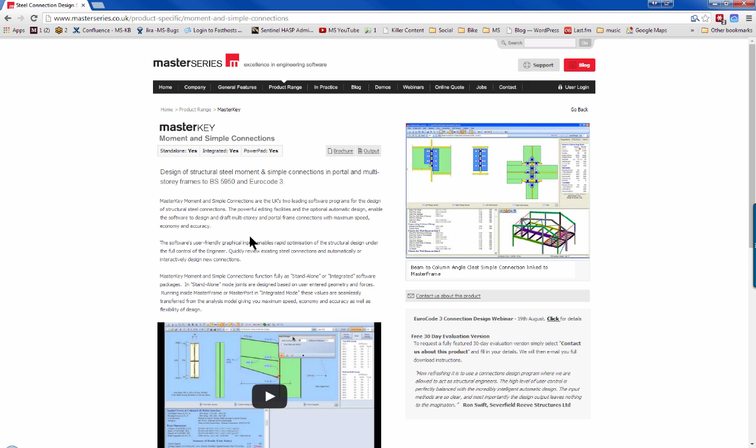Now, one of the most popular questions I get asked is, well, what sort of connections can we do? And just before we go into the use of the software, I'll just pop up this little diagram that shows you we can do eaves type connections, apexes, base plates, beam splices, column splices, beam simple connections, flexible end plates, fin plates, angle cleats, and the same with the columns. So let's go and use the software and we'll just review these different types of connections.

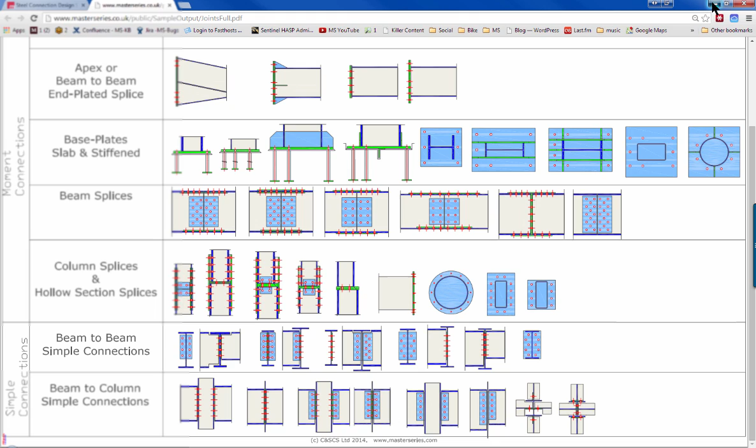So it's going to be 4 stages today. We're going to first of all view and review the types of connections that can be done using the MasterSeries, and then we'll design a few joints manually to show you how easy and fast and flexible it is for designing joints. And then thirdly, we'll look at the use of the linked design.

For those of you who have our frame analysis or portal frames, the job's even easier because you can just pull the data straight in from there. And then finally, we'll do a review and we will look at the differences between the Eurocode and the previous BS design. So let's start the MasterSeries.

I should say that I am broadcasting today to over 20 countries. I know I have people coming in from as far afield as Mexico and the USA, to the west of me, and the Seychelles and Korea and the Philippines, India, Malaysia, Malta, all over to the right, who are staying up late to see me talk.

Okay, front screen of the MasterSeries, very simple, very straightforward. I'm using version 2014-08, August 2014. I'm also using a 64-bit version. With connections, that's not a big problem, but if it was finite elements and dynamic analysis and stuff like that, yes, that's what you want to be using. So, without any further talk, let's just go straight into connections.

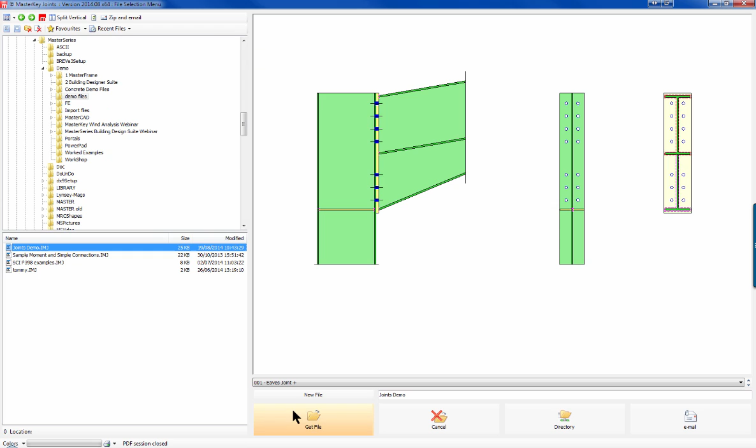And I'm going to go to my recent files, and let's look at this joints demo file that I've prepared for you. You can see we can review it before we select it. We can select other files and we can use short and long file names. But I'm just going to get this file and have a quick review. So first of all, we have our standard connection. We have our standard eaves type portal frame connection.

Bolts, end plates, welds. And the nice thing is that we can easily modify these things. If I wanted to remove that row of bolts, I just go to my bolts tab and I just say I don't want that row of bolts, and everything suddenly updates. That updates, the results update.

If I take out another row of bolts, that updates, and in this case it was just a graphical thing, but with one row of bolts top, it's now failing. I know it's failing because it's all gone blue down below, but we'll look at that in detail when we're doing some design. Let's move through the different connections. I have 21 connections here, different typical connections.

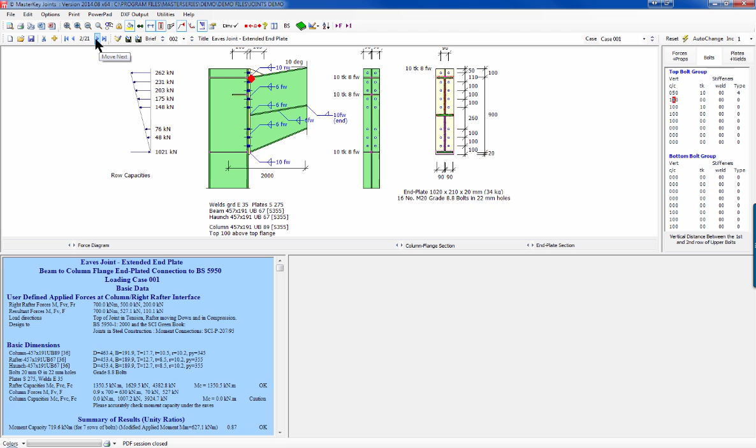This is the same with an extended end plate. In this case, the weld is not happy. So we've got our blue and we've got our weld, but we're not in the design process yet. So we'll just move on. And we're now into an extended end plate. Yes, we can do more than one row of bolts above and below. We can actually do up to 3 rows of bolts above if you ever really want to do it.

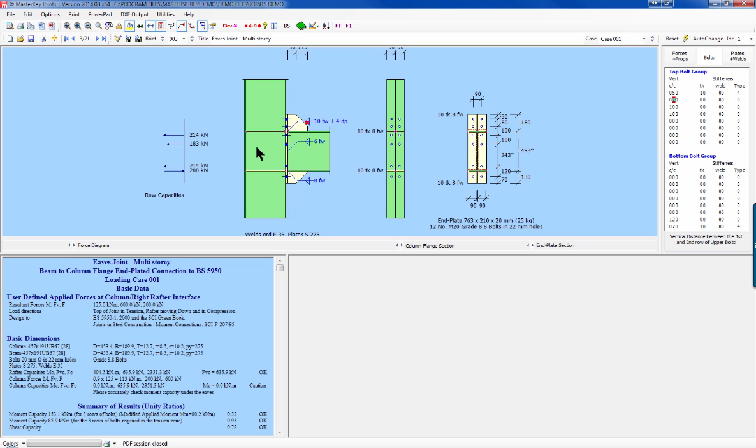The only requirement is that if there's more than 1 row of bolts above the top flange, it needs to be stiffened. And likewise on the bottom. So we could do quite enormous stiffened gusset connections.

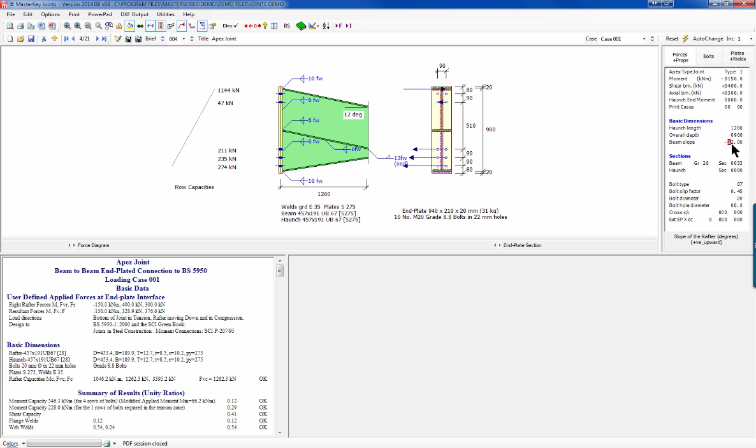Moving forward, we then move into our typical apex connection. And the apex can be either this type of haunched apex standard, or it could even be your more standard simple connection. If I came along here very quickly and just said, there we go, no haunch, no slope, it's just a beam to beam connection as an end-plated splice.

Moving forward, we then come into our base plates, axial, or in this case we do have a moment. We can see our moment because our compression area is offset to one side. I will add that we're all doing this to the Eurocode as we advertised.

We're also designing, and I should actually say no, we're not. We're now doing it to Eurocode. I apologize. We can switch between codes. So now we're designing to the Eurocode 3, and we're using the UK National Annex. Now at the end of this seminar, I will hopefully go back and show you, if I remember, how to change your national annexes.

You can, under your standard design options, choose what annexes you have. I have the UK, Ireland, the Euro norm, and I have created an additional one of the UK with a bit of a modification factor, which is really sometimes used in analysis of frames rather than anything. So I'll stick with the UK. So the UK National Annex,

and we can see that we're also working to publication P398. This is the big SCI publication on moment connections that took quite a long time to come out, and thus the delay in everybody releasing full moment connections to the Eurocode.

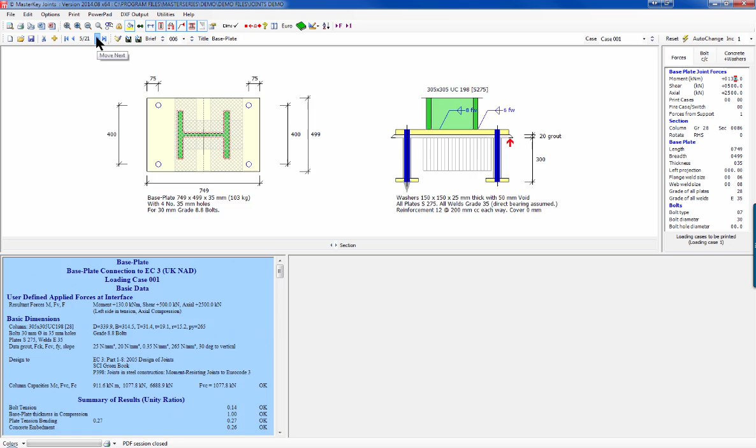And then also we have the same for the hollow sections, be they circular or rectangular hollow sections. For the circular hollow sections, we can even put the bolts on a pitch circle diameter for you and give you a circular compression area and a circular cantilevers out from the flange.

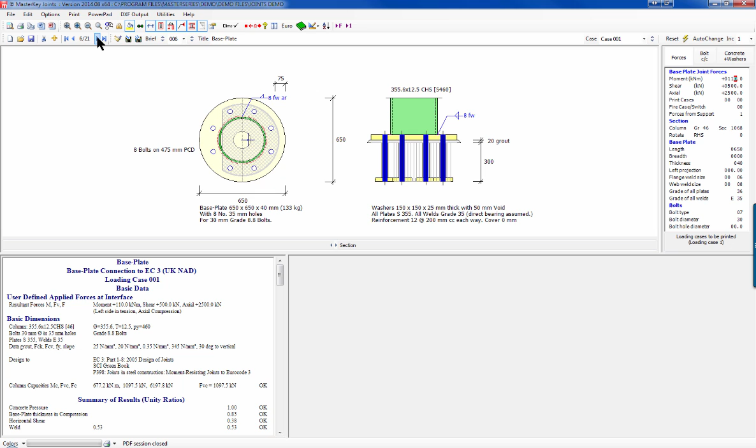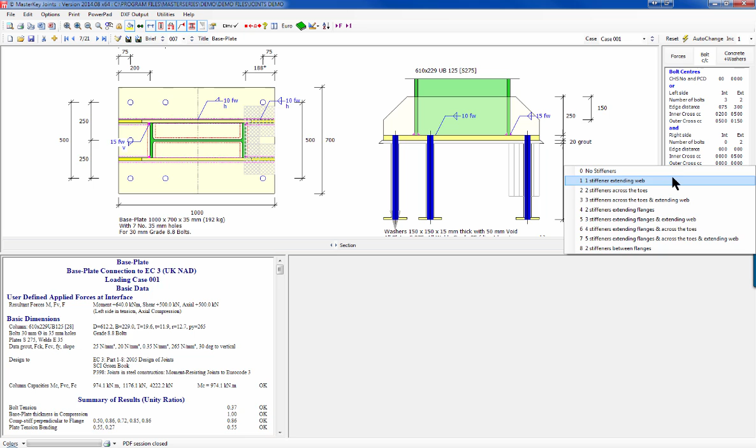And then we have the stiffened base plate. So we're still only on our third principal connection, and this is our base plate with stiffening. We have quite a few different configurations of stiffeners, and if I just moved over to the stiffeners, I can ask for one coming out of the web, so extending the web. In this case it isn't going to help us.

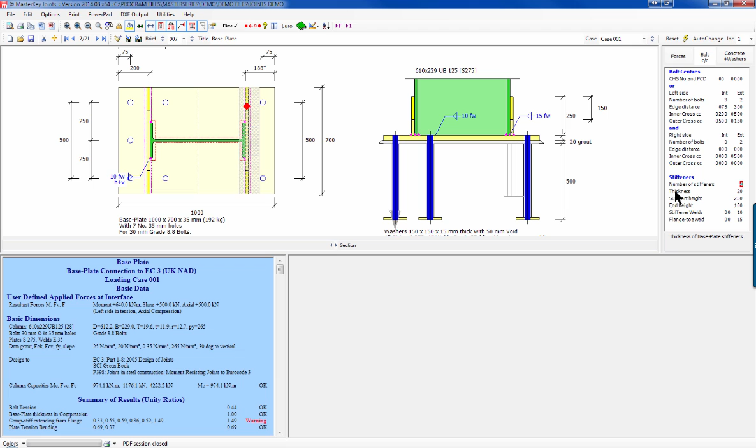If I click again, we can have two across the toes as we saw. We can have toes plus the web. We can have the extending flanges. So that's going right across the flanges, making those flanges wider and giving us a wider area to bend against. Again, in this case, it's still not very, very happy. And we can go all the way up to having stiffeners sticking out everywhere. And very, very complex to build, very expensive to build.

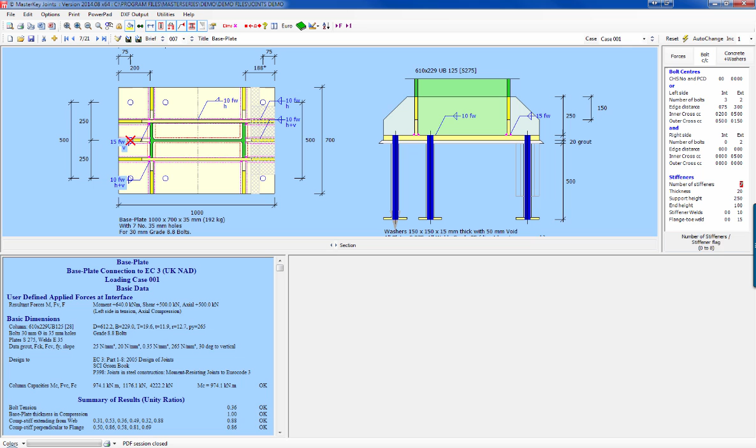Obviously, when you have a lot of bolts in tension, that's probably the type of thing you might want to go for. But personally, these days, we find it a lot more economical to just put a thicker base plate in the first place. So that's your base plates.

And now we're moving into the fourth type, the beam splice. The beam splice, very straightforward. Top and bottom plates, and different number of bolts top and bottom, web plate. We can also have internal bolt plates, and as you should notice there, we also have countersunk bolts.

We could do the countersinking if we went back. We can countersink very easily. Flange plates, I wish to have them countersunk. And our capacities should just change ever so slightly due to the countersinking, because it will make allowance for those.

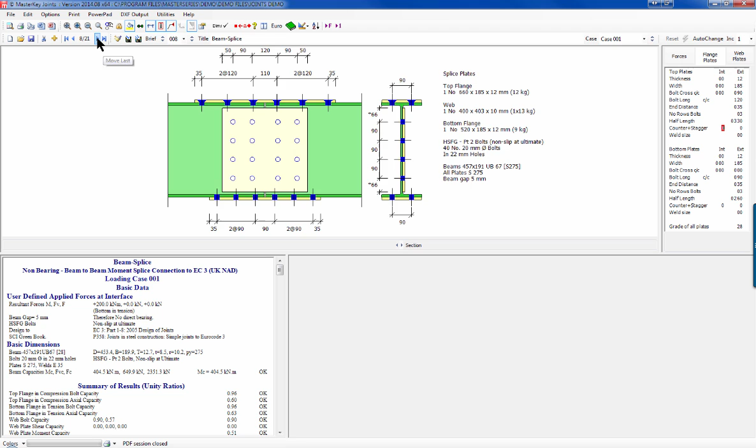And then we also were able to do complex staggered. So this is staggered in pairs. So outer, inner, outer, inner. But we also have, and very useful in very narrow flanges, is two bolts alternately staggered.

And all that means is we get a better net area for tension, because when you have a very narrow flange, a 133 or 102, putting two 20mm bolts in 22 holes is going to take out 44mm out of your precious 102, which is very, very expensive. So instead you can stagger these and spread them out so that at any one point it's only one, or with the staggering calculation, maybe 1.2 bolts taken out. Very, very useful.

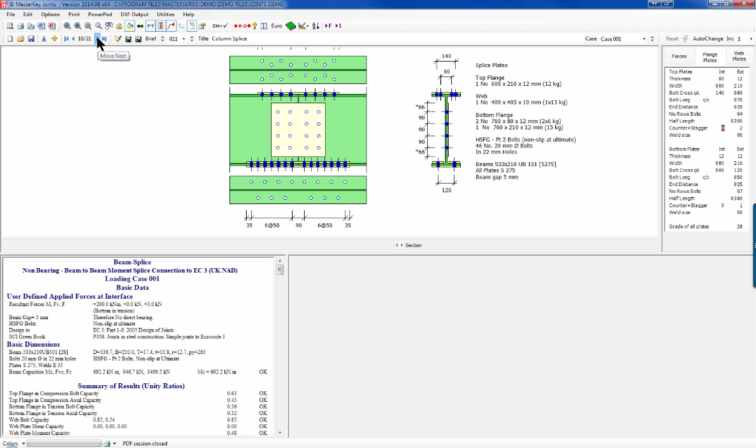We now move into the column splice, and we're looking here at the standard column splice, non-bearing cover plates. Very straightforward. We can do obviously column splices that have a different thickness or different section size above and below. In this case we've countersunk the bolts again to keep it nice and clean. We've gone for division plates so we can see and confirm our spread of bearing between them, with angle cleat attachments at the web.

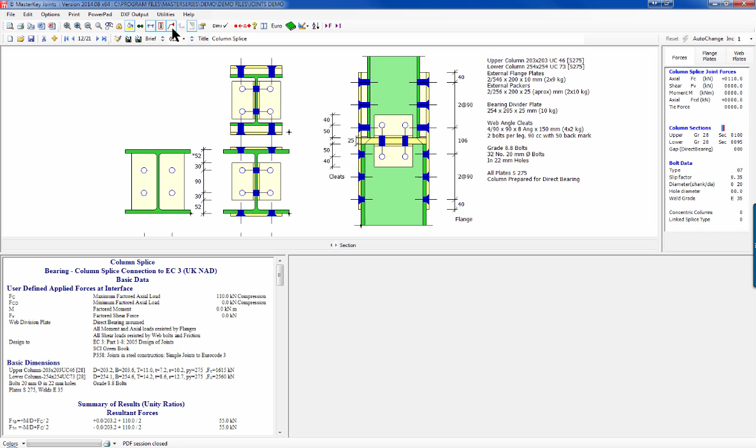And finally we can, in the column splice, do cap and base plate connections. Not ideal for doing colossal moments, but for small moments and axial loads, perfectly fine.

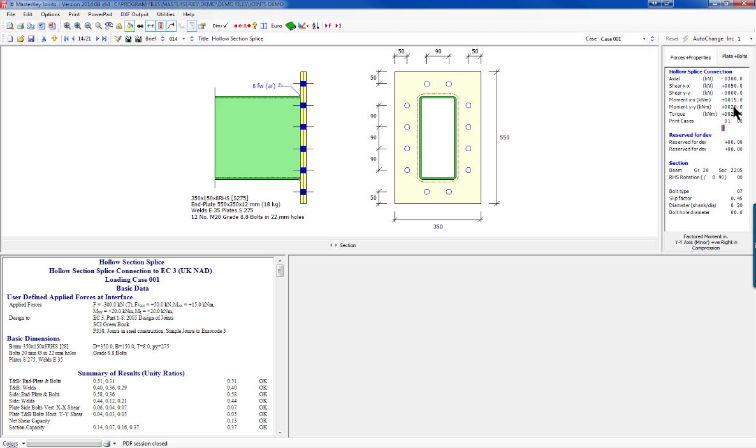And now we want to move into the hollow section splice. The rectangular and square hollow sections, you can define top, bottom, left and right bolts. You can actually in this connection define torsion and everything. You have shear in two directions, moment in two directions, and a torque. So all 6 degrees of freedom, or all 6 restraint directions, are resisted. And then your circular hollow section splice.

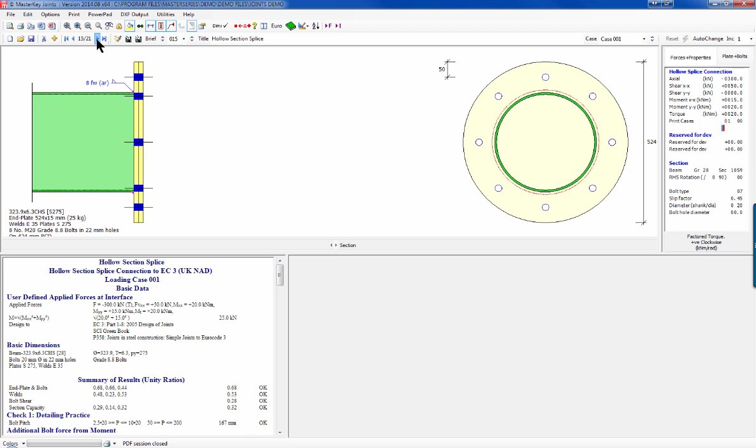Very straightforward there. Now finally, and very, very quickly, we'll move into the simple connections. Now the simple connections to Eurocode have been out for quite a while, because that publication was produced about 1.5 years, 2 years ago. That is the P358 rather than the 398. The 358's been out for quite a while.

In this case we're looking at a plate girder. We've built up a section that's about 1200 deep, and in one case we've got a single notch, on the other side we've got a double notch, and we're designing that for you. Plate girders are dead easy. Just choose a section and just put in the values and go.

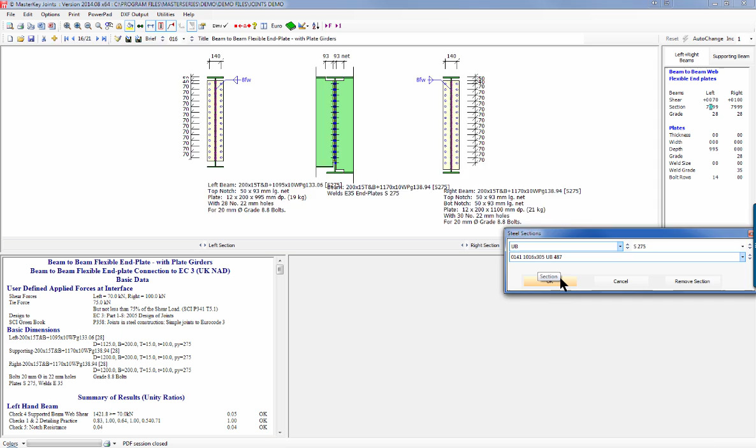If you wanted to, on this left hand side, we want to say, well actually we don't want to use a built up, we're just going to go for a 1016 by 305 section. It will then pop in that section and start to design. Now it's gone blue in the top because now with our bolt configurations, this bolt is hitting this flange, and we would need to make preparation to remove that or reduce the number of bolts on the other side. I will not fix that at this moment in time.

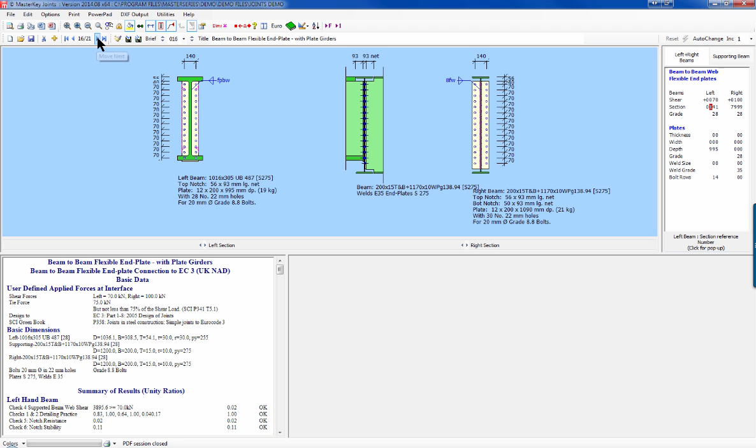And then the second type of simple connection is your most popular one these days, your fin plate. And we can handle both single rows and double rows, or in this case a double row with the bolts alternately staggered.

We also do the two forms where you can have a rigid support or a flexible support, and that's quite useful. The default is to assume that this is just a shear load in the web and the weld, and therefore you have a torsional moment on these bolts, which puts a lot of load on the bolts. Whereas if you assume a rigid support, you have shear and moment on the weld and just pure shear on the bolts, and that reduces the additional loading due to torsion, which theoretically no longer exists on those bolts. Both methods are valid to the Eurocode, and we cover both.

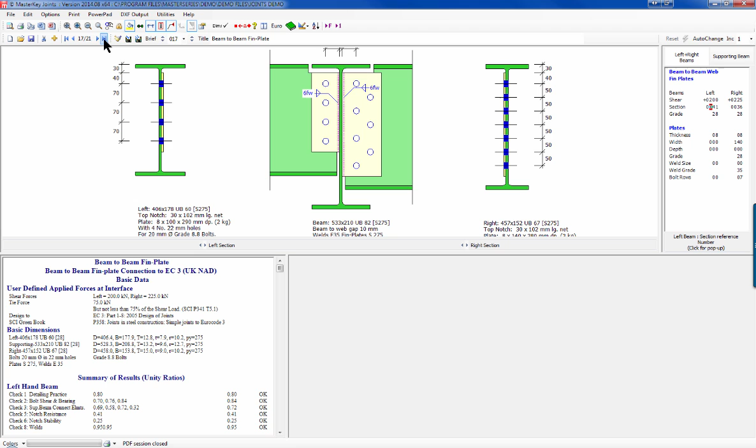And then finally you have the angle cleat. The angle cleat's quite strange in that in the Eurocode they've actually left it out. But there's no reason why we can't design the angle cleat using the rules and methods of the flexible end plate and the fin plate together, and that's what we've done. We have given you this angle cleat.

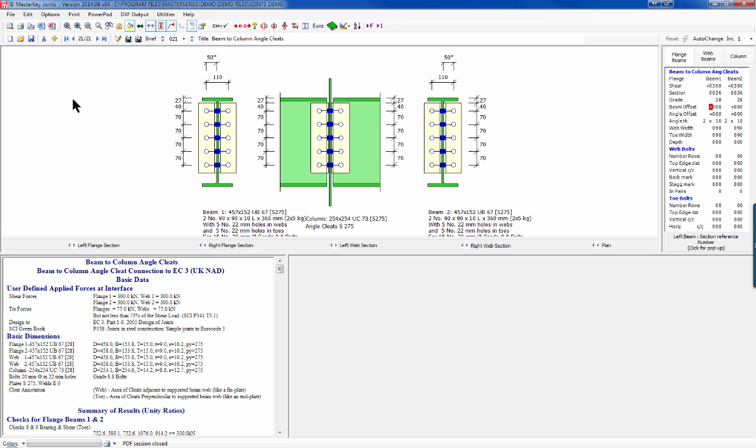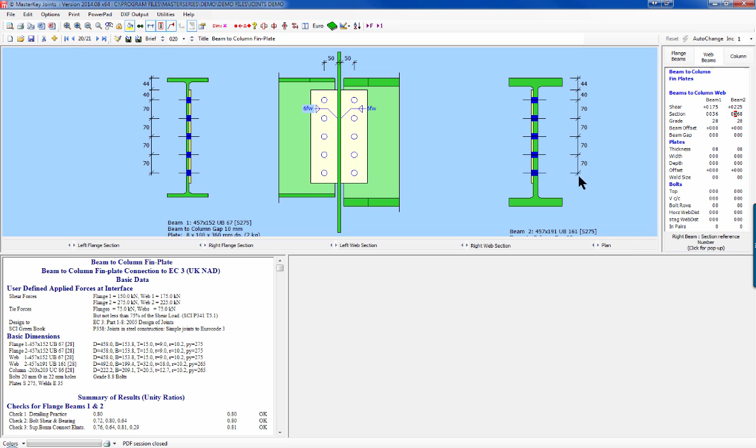And then of course we can do the same connections with columns. In this case this is a column connection rather than a beam. And the nice thing I think about the column connections, and I think the previous one was a column connection as well, for the fin plate is we can notch our connections. So if I was to go to my web and say that my column section on the one side wasn't a 152 wide, but let's go way up to a 191, and then we looked at the column, we'll see that it actually notches in that flange so that it fits.

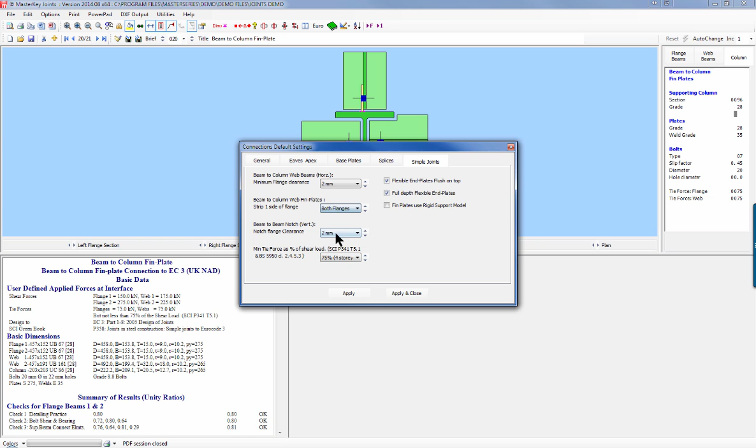We've also, because of this line, taken out the bottom flange so that we can present that beam down the middle of the column web and drop it into place. Otherwise, if we didn't take this out, the fin plate would be hitting it. For those who want to be safe and give the fabricator the option of going either way, we can elect to drop not just the bottom flange but both flanges, and we say apply and close, and therefore we lose this totally on this side so that we give the erector full scope to present his beam up to the fin plate in either direction.

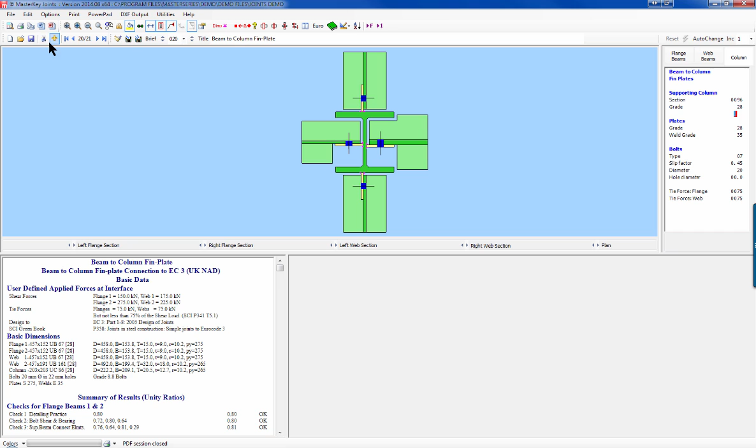So that is in essence the typical joints that we do. So let's go and design a joint. Let's create a new joint. I'm going to go for a beam to column flange. Okay. And first of all, I'm going to set some physical sizes. Column size 610, but we'll go for an S355. Beam size, I'm happy, but I'll go for the 355 these days and say OK.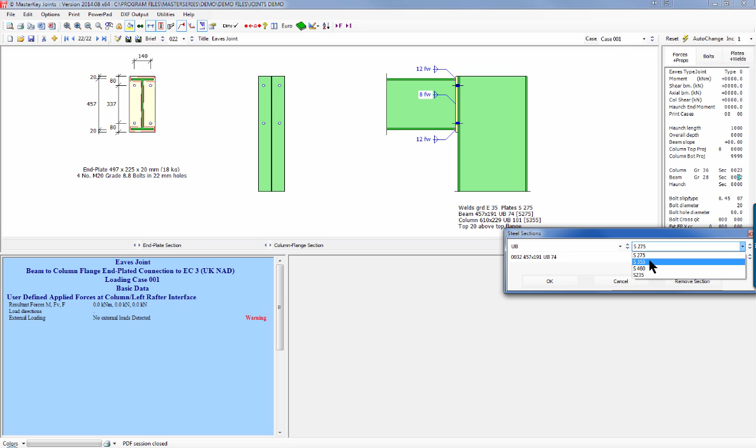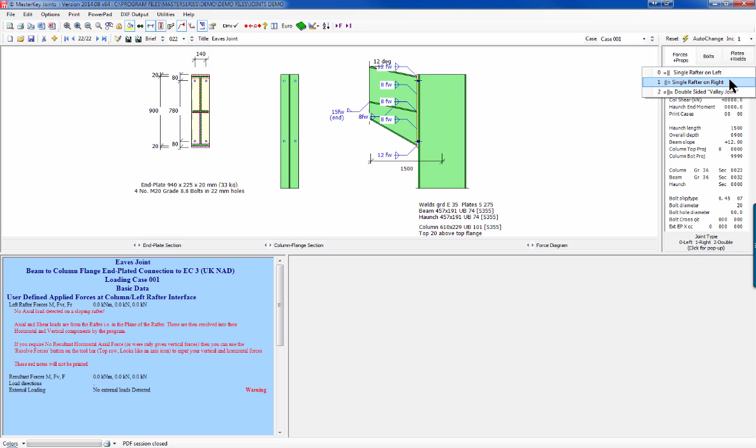I'll now make it such that it is 900 deep and 1500 long, and I'm going to give it a slope of 12 degrees. So I just want that actually to face the other direction so that it looks the way it is on my calculation. So this is the connection I'm going to design.

Let's put some values on it. I'm going to give it a 500 kilonewton meter moment, and I'm going to give it a shear of 350 and an axial of 240. I'm going to say the column shear pre-existing is nothing because we're just in a portal frame, and the end of haunch moment is 300.

So looking at it now, we have, as we can see, a blue background. We've got failures. We're failing by 2.25%. So the first thing I would do would be to add more bolts very quickly. Give me another row at 90. So we're now down to only 49% overstressed. Very quickly we're getting there, but we can see from here that it's no longer the bolts that's the problem,

it is the compression. So we come in and we will add in a bottom stiffener, and we'll put a 12mm stiffener. So we've now dropped back down and we're now only 34% overstressed. Let's add another row of bolts and make that 90. So bolts are happy, shear capacity is not. We can either add another row here and let them be used in shear, or more correctly put another row down here. So I'm going to go for my bottom group and put another row 90 up, and my connection very quickly now works.

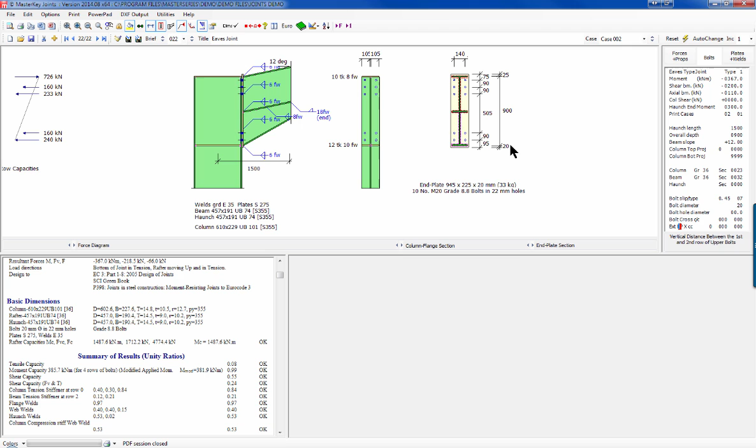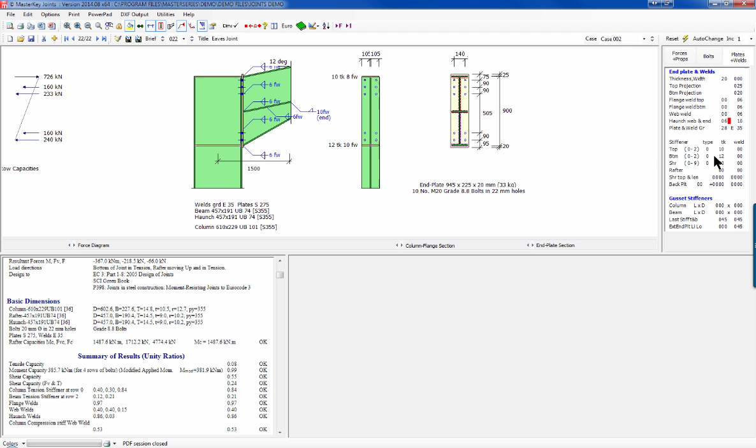If we wanted to, and I'm just going to push this out a wee bit so we can see it. This 6 mil weld, if we were into a large weld, say a 15 mil weld, that's a very large weld to lay down. Now both the BS and the Eurocode allow you to do something called deep penetration, where you're welding with such good quality welding materials and welders that you're able to guarantee that you'll get 3, 4, 5 mil of interpenetration between the plates to give you an extra weld. So you could say put down a 10 mil with a 5 mil deep penetration. So it's limiting it to 4 mil maximum deep penetration, and so it's giving us a 14 mil weld there.

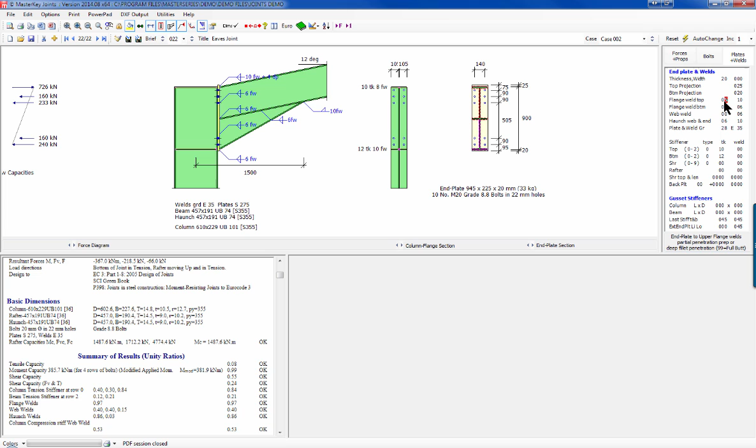So we have facilities like that. So that's how easy it is to design a connection. That's how quick and easy it is.

If I was to take a beam splice, add myself in a beam splice, and say OK, section 33, I'm happy with that. Now the moment capacity is 400 and the shear is 600 and the axial is 2300 of my section. So I'm going to put in a moment in MX of say 250. Alarm bells, ding, ding, ding. Things are problematic. And a shear of 100 and an axial of 400.

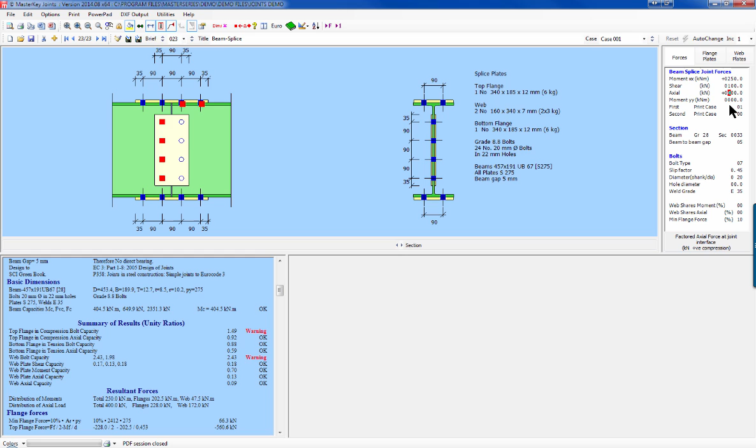So what I need to do is to come down and look at my problems in reality. So clearly it's the bolt and shear. We could possibly thicken up, but it's the ultimate, it's the problematic one, giving us 94 ultimate area. So it's no good looking at the bearing of these. The bolt itself is the problematic area. So we need more bolts.

Very, very simple. And one of the nice things we've got in the program is this ability to use something called auto change. And auto change saves you typing. So if I go to flange plates I can say, give me 3 rows of bolts. Hey, it's happy. Top. Now the bottom doesn't need as much because it was in compression and therefore has been cancelled out. Half compression plus the tension gives us a smaller value.

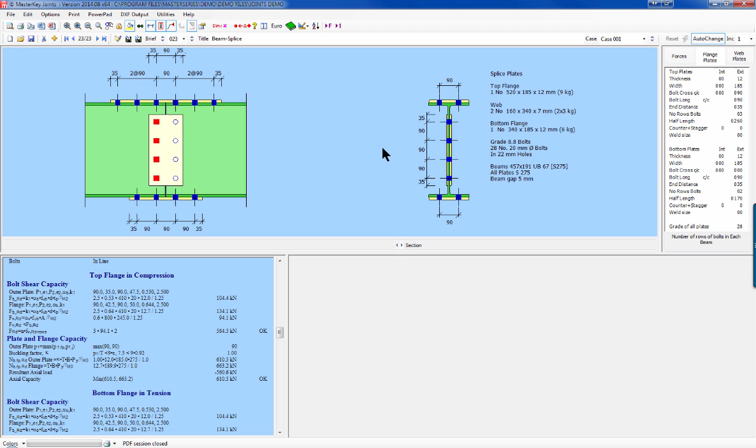My next problem is my web plates, and we're way up here in our design. Our shear of this plate is not very healthy. So what do we need to do? We need to get possibly some thicker plates and some more bolts. So let's go to web and we will see whether or not putting in another row of bolts does help. It's bringing those values down. So that is a solution. It's a big problem.

Let's see if there's another solution. We're only at 13% overstressed here. Maybe if we lengthened the bolts up, we would get the lever arms we want, but now our bolts are too close together. So coming back to 95, let's increase the thickness from 7 to 10 mil. So that's solving everything but this problem with the physical bolt. The plates are now okay, but the bolts themselves are not happy.

We could possibly go for a different type of bolt or larger diameter. So let's look at our bolt types. Well, we're using 8.8s. 8.8s are not necessarily the best to be using in these environments because your whole joint can slip, and actually there would be a warning in our dimensions that we should really use either close tolerance holes or high strength friction grips. So I'm going to go for tension control bolts. Oh yeah, they're not necessarily as good as one thinks. We're going to need more bolts. Sorry about that.

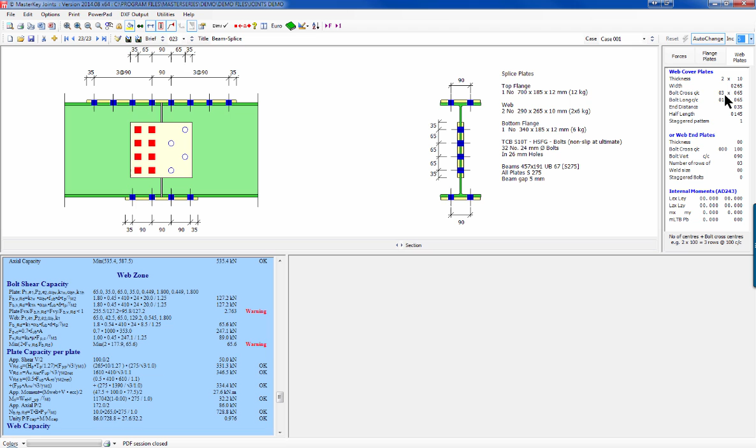Now, we possibly could have reduced the overhead here by trying to stagger these bolts, pull their centers down, say about 65 by 70, 65, and then we go up and then go out and out and out. So it's probably 2 or 3 bolts less in total to make that work with staggered bolts.

Possibly pulling that in, extending that up and up. There we go. By giving it a bit more vertical lever arm, we've got away with fewer bolts in the web. You can actually also in certain instances go for only one web plate, but not necessarily a wise thing always. So that is a couple of joints designed, a beam splice and a moment connection, all very, very simple.

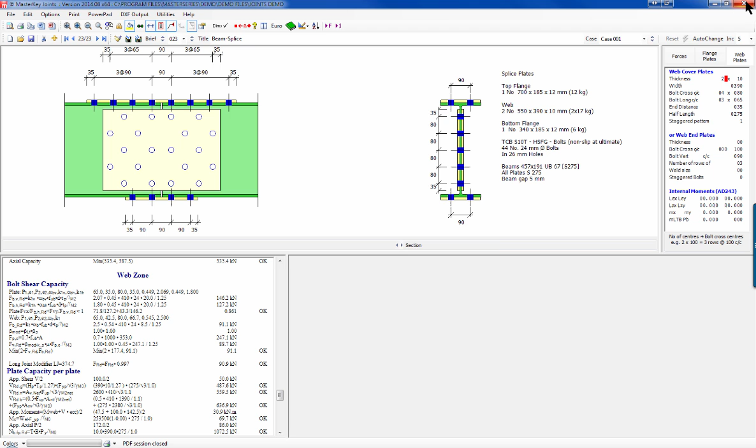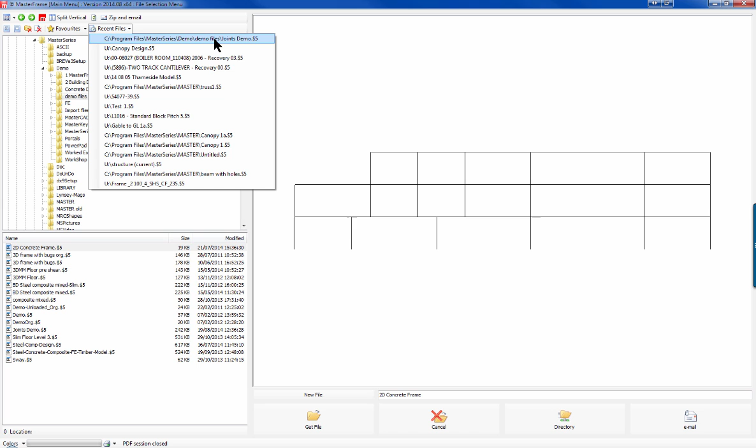The second way that we use this program is in what we call linked design, integrating with our frames, our portal frames, our multi-story structures, our industrial buildings, whatever you want. Recent files, my joint demo is a pretty strange structure, but I thought it was quite nice, so I chose this to load. So this is my little frame.

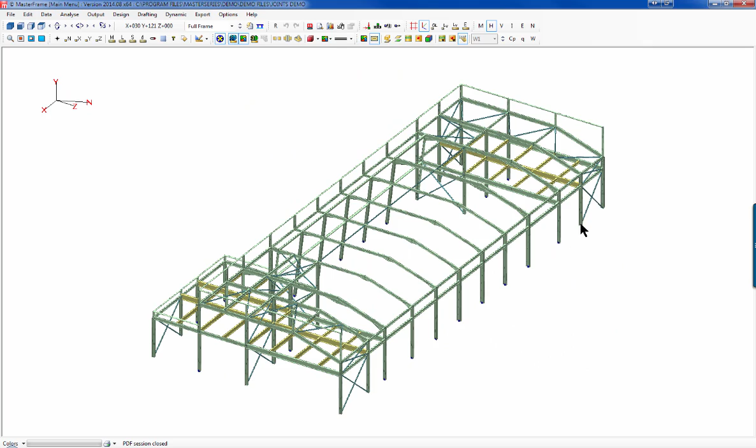I'm not going to claim that it's perfectly designed because it's not. Some of the section sizes are all different down here just for our demonstration purposes. Some of the loading is just for our demonstration purposes.

Just excuse me a second. I have a little application here that seems to be popping in and out.

I'm just going to get rid of that. There it goes. We won't have that interrupting us anymore. Sorry about that. So let's analyze it.

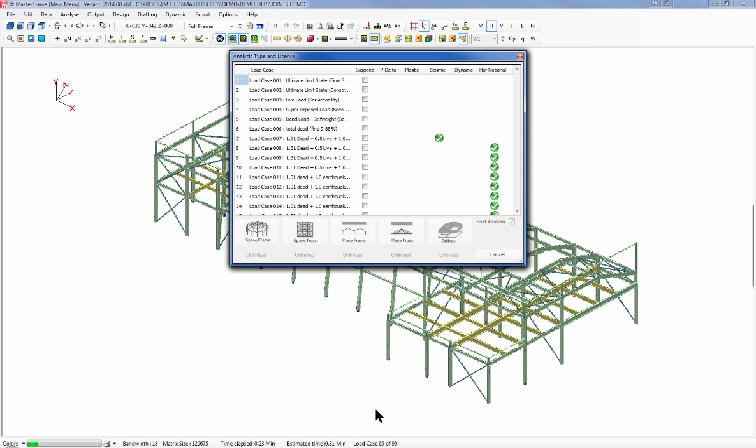90 loading cases as a space frame very quickly. It's going to take about half a minute, less. It's 25, 30, 40 cases. It's telling me that down here at the bottom if you're keeping track. 60 cases, 70, 80, 90 coming up in a second or two. So that's a frame reanalyzed just to make sure everything's correct. Now the yellow sections for your information are composite beams, and the green ones are our normal structural steel.

So design, connection design. So I have already set up some connections for us. So if we look at our frame, we'll see that this is a haunch. And again, if I reset that back to nothing, we'll find it's failing and failing. I can now come in and say auto design, and it will design that connection for us for all loading cases, in this case all 90 loading cases, very quickly, doing a double pass to confirm everything's okay, and then we can sort this bit out manually afterwards, and it's nearly done everything for us.

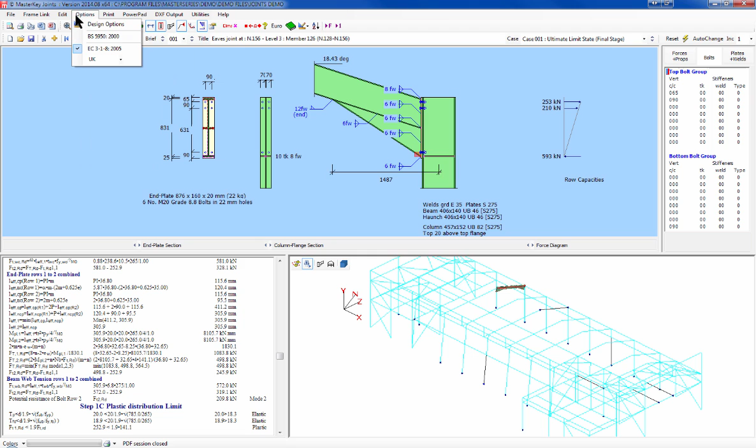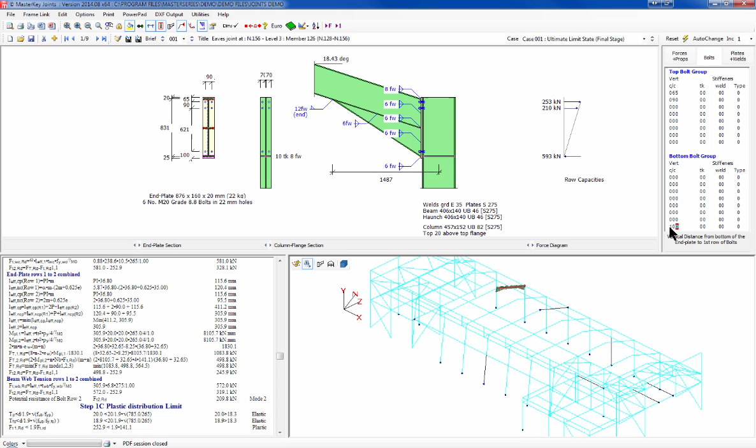And I can see the only problem is the clash coming in tight. It's telling us that this bolt may not be accessible. Now there's two ways of solving that. One way is to come in to options and tell it in eaves and apex to draw the nut the other way around, and then there's no problem because the bolt's been presented from this side with the nut coming in from this side, and then there's no problem getting it in. And that's a solution, but obviously quite frequently you prefer it the other way around, so we could have come in and very quickly just lifted that up, and it's done all the loading cases.

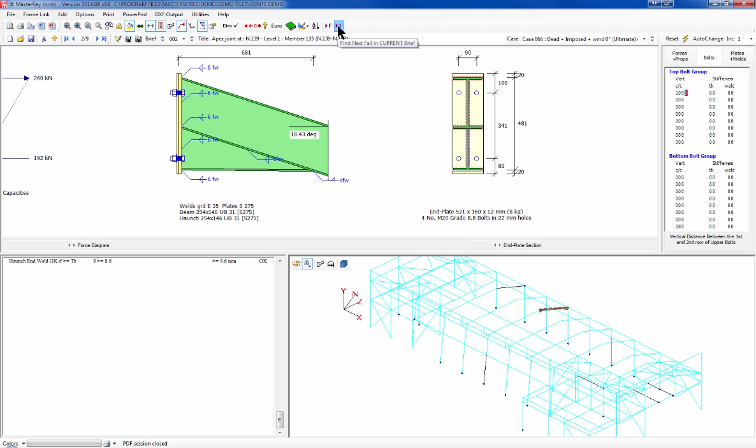And if we then take this member here, we'll see we've got an apex connection here, and again we've got this problem with the spacing. And if we look at the dimensions, it'll tell us could be a problem. So very simply, on the top we'll just drop that to 100 down, and it's fine. And we'll just check that that's okay for all loading cases, and it's fine. Okay, what else have we got here?

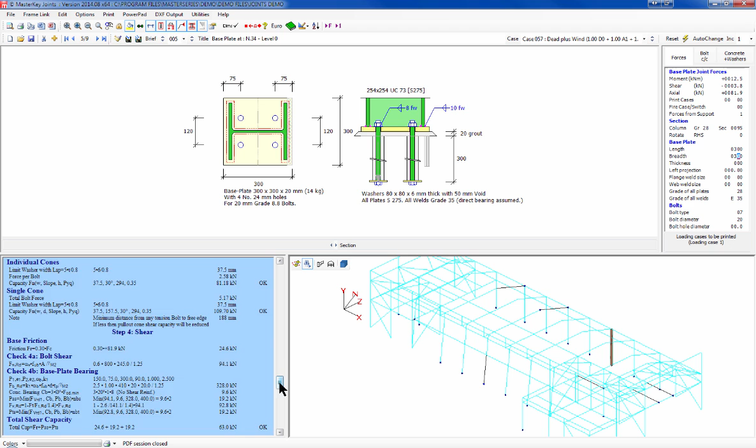We've got a column, and we've got a column that is looking okay. Let's just scan it, and we find that it's actually a bit of a problem in loading case 46. Boy, I wouldn't like to have gone through those one at a time to find that. So what's the solution? We can ask the program, or we can do it ourselves. And the solution is really to go out to something a bit bigger, say a 300 by 300 base. Nice standard size. We still have a problem with the projections.

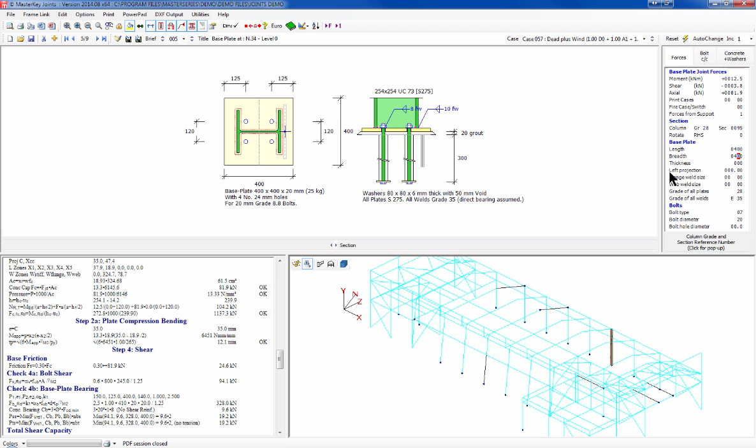So I'm going to take my bolts outside. I'm going to make this a 400 by 400 base, a standard size base, and everything now is happy. Well, actually the bolts are still inside, so probably I think the standard is 500 by 500. There we go. And you'd probably put those bolts to the corners.

Edge distance, cross centers. Edge distance is 50. Cross centers will be probably at least 300. No, 400. So standard bolts, 50 in, 50 in. So 50 and 400. Now the beauty about this is we could come along at this point in time and say use this as the default for any more base plates.

So I can specify my basic dimensions, I can specify my basic welds, I can specify my grout and concrete grades, which are very light at the minute and very small. I can specify whether I have mesh and things like that all automatically in this program. And I can do that for all the different types of joints.

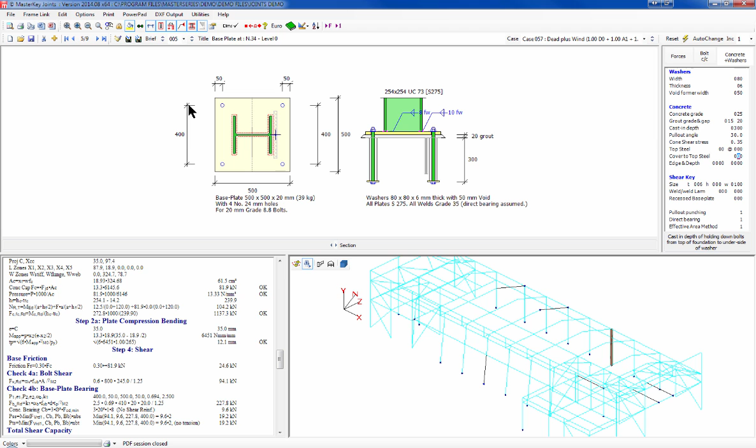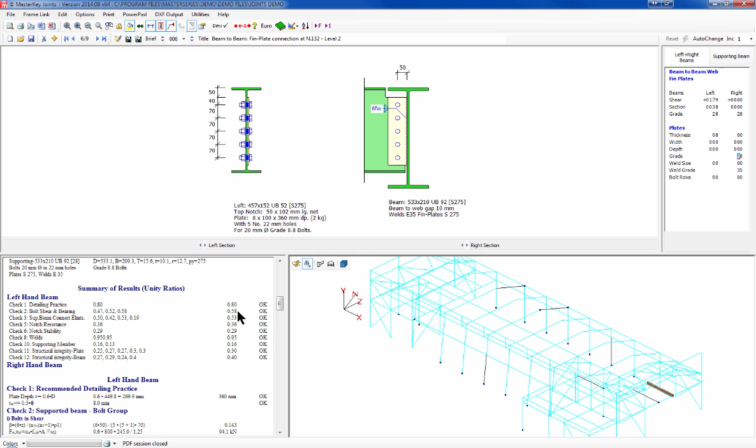We also were looking at the simple connections. So if we look at here, we have a fin plate beam to beam and 179 kilonewtons. That's not going to cause much problems. Well, we're up to 60% of our load. It's quite well in. And then we also have the same with a flexible end plate, which is probably more bolts, so therefore we've got a far lower utilization.

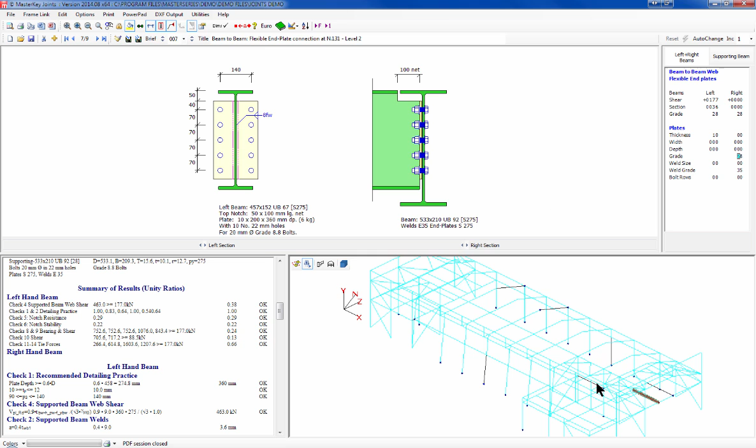So you can understand why the fin plate these days is becoming more popular. The same amount of welding, half the plate, half the bolts, for quite a few connections. And in this very competitive environment, that is important. What else have we got? We should have in here somewhere a beam to column. Here we go, beam to column. And if we put it into the column view, we will see again the notching of these beams as we expect.

And it's the fin plate that's offset, so the beam comes in concentric on the design. And again, all your design checks are being catered for here. Even if you look at it, structural integrity check, so checking the bearing and tension.

And if we go down to the column web side, we will see it's checking the structural integrity of that, and it's also checking the column wall just to make sure everything's okay. So all your design checks there, straightforward and very simply done. So that's integrated design, that's standalone design, same program.

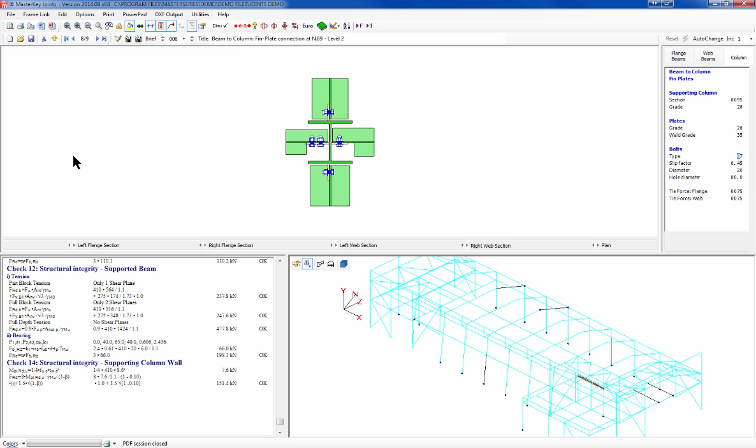So coming back, and I'll come back really to my previous example, I want now to look at the fourth topic, the differences between the codes. So back out of here into my connections, and I'll just choose some SCI worked examples because it's easier to navigate. These are example files that were in the SCI worked Green Book.

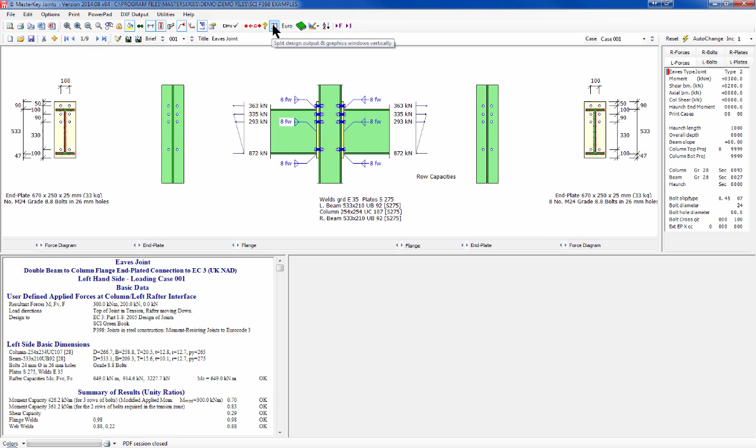So eaves joints, what's the first thing that's different between the BS and the Eurocode? Well, the first thing, and I'm just going to switch this so that we see a slightly smaller graphic but more of the results, that allows me to move about a lot easier. And I'll just turn off some of the symbols as well, so we can just see the basics, turn off all the dimensions, and we'll turn off our force diagram. So there's our basic joint.

So the first thing that's different is that we have now got circular and non-circular yield line patterns in our T-stubs for our connection. So bolt row, we end up with circular and non-circular. So we come down to bolt row 2, probably more common, and we'll see that we have our non-circular patterns, and bolt row 1 we have circular and non-circular patterns. So in mode 1 we choose both circular and non-circular. In mode 2 now we use non-circular only. So that's a major difference, not necessarily a big difference in results, but we're only using half the yield line patterns for the mode 2 failure where you have prying and failure.

The next thing is that the bolt resistance formulas are slightly different to take into consideration the size of the head and the washer. So we will get slight differences in those formulas. The methods themselves are very similar, if unchanged. So it's a slight difference in yield line patterns, capacity is probably the same. The column web is considerably changed. We have this omega and we have this beta value. Now the omega and beta can turn out to cause you headaches, and it's really to do with the interaction of the column web on your connection. So that is going to give you a considerable difference, this omega value, in certain instances.

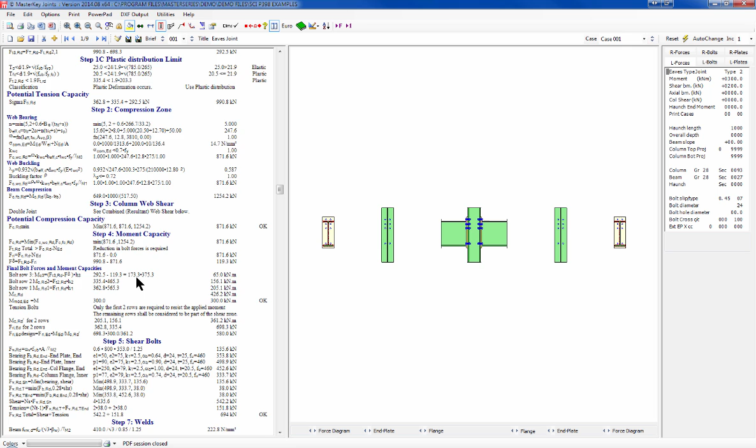Shear is another area that we have a big drop in our capacity in our columns. When a bolt is in pure shear, that's fine. It takes all that capacity. But when a bolt is in shear and tension, we would have used the ratio of the shear and tension values over 1.4. Well, they've modified that, and if you look carefully, they've actually pulled it inside the equation, so it's actually the shear over the shear capacity plus the tension over 1.4 the tension capacity. So it's only one of the two components now that's getting this 1.4 improvement, and that means that we are getting a 30% reduction in the shear capacity of bolts that are in tension. So that's again another big problematic area.

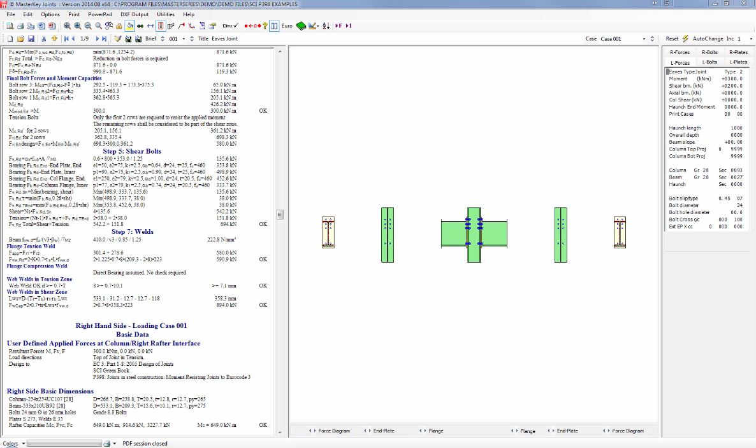Another area that can be problematic, and not in this example because you don't have a haunch, is when we do have a haunch. Because we end up with a different set of rules for our haunched design. Now, do I have a haunched design? I thought I had a haunched connection. I don't. So I'll just nip back and open my other file. Yeah, that'll do.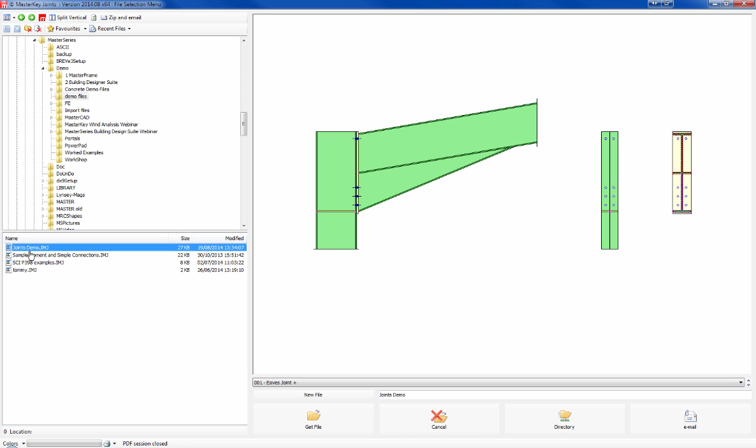What we're seeing in our design is that previously we would have taken whatever we could down the web and whatever we could down the flange and designed the welds accordingly, and just made sure that each of them could resist a quarter of the load, just to make sure you weren't applying all the force down one load path. Well, that wasn't even in the Green Book previously. The way they had it done was totally vague, and they just said full size welds. And we came up with this method with discussions with the SCI. They've now gone one stage further, and they've said that you can have a limit to the amount of force you can apply to each of these. So basically 50% of the applied compression forces can be taken into the haunch flange.

So it puts more onus on these two welds, and we are beginning to find bigger welds. You couldn't say you've got a nice long web, we'll take 75% down here and a quarter here. It says no, 50%. So you end up with larger welds here than you were expecting previously. We are also finding larger compressive forces here being designed for with this weaker buckling capacity. So these are also resulting in stiffeners being applied here that weren't existing previously. The only other thing that is different, really, what is it? I've covered that. No, that's about it on the eaves connection, and the apex is the same.

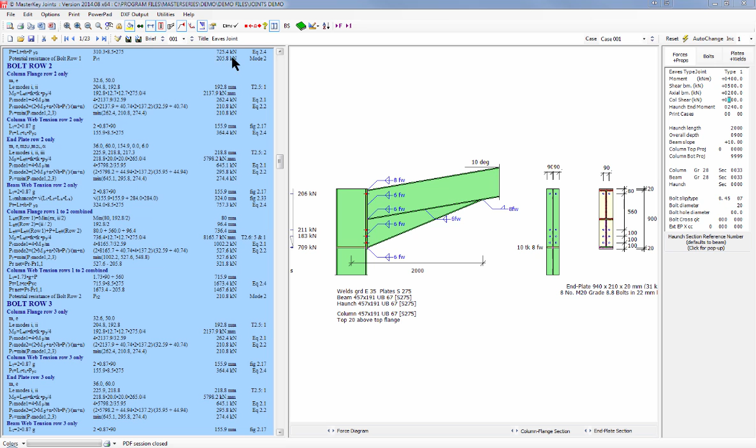So moving forward, we're looking now at the other types of connections, the beam splices. The big difference in the beam splice is in the way the forces are dispersed. Previously we were allowed to, whoops, sorry about that, there we go. Sorry, my scrolling mouse, back here. I'll just click here to take it off the focus there.

Previously we were allowed to specify where we could share the load, moment in the flanges or in the web, and axial in the flanges and the web. That is now sort of cast in stone. And it's cast in stone in that the moment is always shared between the flange and the web, and the axial is shared between the flanges and the web. The moment is proportional to inertia, that makes sense. The axial is proportional to area, and these can have a significant effect on your web.

Now, the other thing that's considered also in these is the buckling of these cover plates. And finally, there's a new minimum resistance check of 0.25 of the capacity. Even if you've a little moment in your beam, you still need to satisfy MEd greater than 0.25 MRd. So you need to have a resistance that can resist those loads.

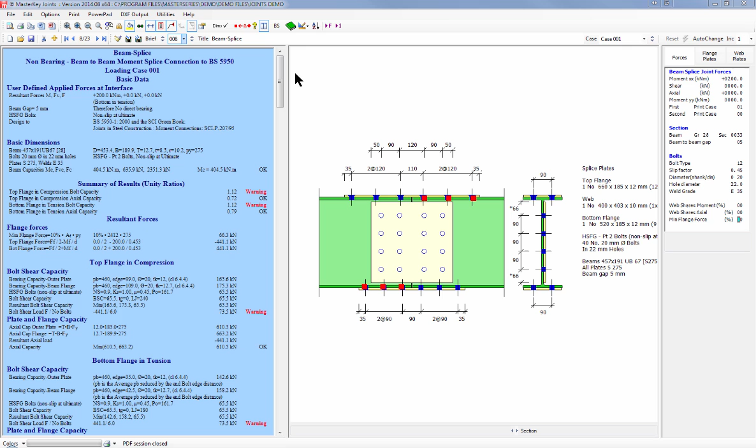Now finally, hollow section, there's nothing really, no change there other than for the previous. Base plates is quite a big change. The big change in base plates, and let's get to a simpler base plate so we can just understand this easily, is in the calculation.

Whoops, we just flicked the BS for a second there. We're back to Eurocode. That's better. And we find we're not working because I had twiddled with my load earlier in the morning. So let's look at our base plates.

Concrete pressure. We have this thing called the pad diffusion ratio. The SCI default alpha is 1.5, and then the grout ratio βj is 0.67, and the quick-minded of you will figure out that those two cancel each other out. So we end up with this fcd of 13, and for bearing we then apply this βj and the alpha, and we end up with the same value for bearing. fcd, fjd is the same.

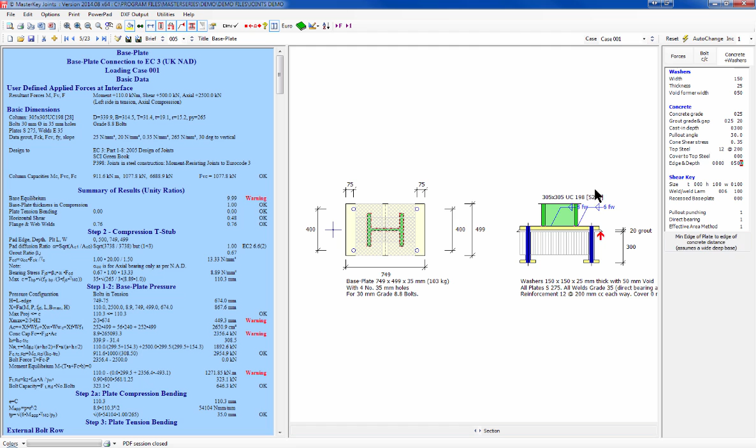But we can do better than that, because if we know that our base plate is onto a pad foundation that is, for example, 500 deep and has got an edge distance of 500, then we will see that the pad diffusion ratio has gone to 1.93, which means our bearing stress has suddenly jumped from 13 to 16.25.

Now I did not take very ludicrous values there. I took a small 500 deep pad foundation, and a 500 edge distance from the center edge of the plate out. And it's all to do with confinement of the concrete according to the concrete code. And it talks about it here, EC2 6.6.2. But that does get you stronger compressive areas than we've had previously, which is great.

And if you're into a huge big base, you can turn around and say, well, actually I have a meter. Makes no difference. What does make the difference is the combination of the two, but principally the depth. So if I went for 750 deep, I've now got a pad diffusion ratio of 2.2. So much better. And we've gone from 13 to just under 20.

And if I made that 600, we might be up there. So if I made that 1500, I made that 800, we're up to 21, 22, so we're getting there. We're pushing it to its limits. Now there is an upper limit, thank goodness, of 3. I apologize there, upper limit of 3, but there's also a minimum of 1.

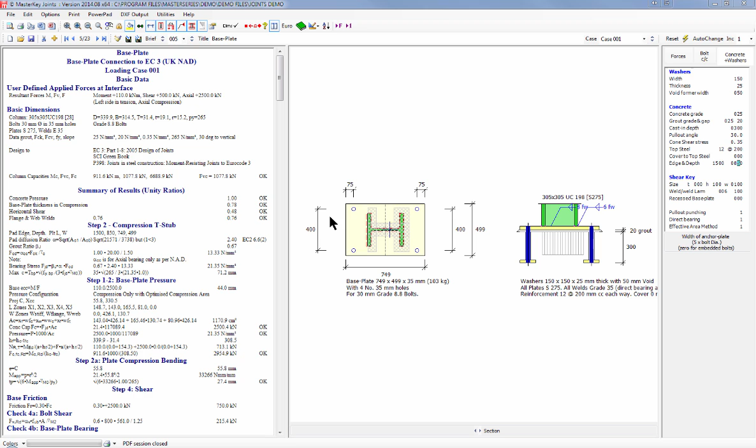Punching shear is a benefit because we no longer use 1.5L, we now use 2L. So that's going to give you a total increase in your perimeter of 4L. A half L round each corner on each side, so it's 4L. So that's another benefit for you in the base plates.